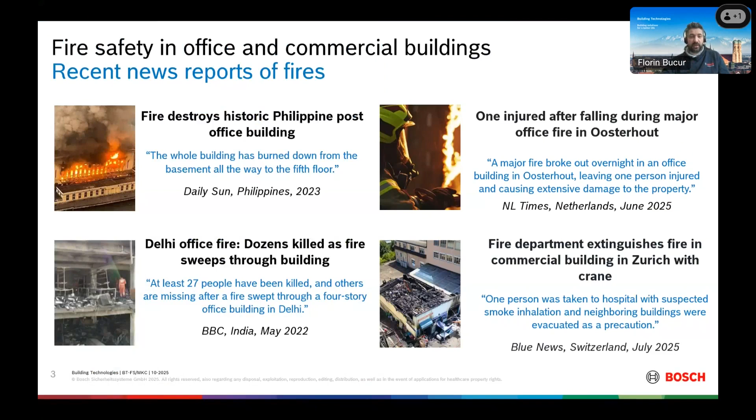As we know, offices and commercial buildings have incidents all around the year, all around the globe. So we see here a couple of examples from the last years where we had fire in different buildings around the world. We see from Asia, we see from Europe, Netherlands, Switzerland, and of course, these are events that we would like not to happen. We would like to mitigate these risks.

And therefore, we have to look into the specific challenges that this environment of office and commercial buildings sets up for our type of system. So let's start with these specific challenges. We have very high occupancies, so usually the commercial buildings are offices combined with restaurants, maybe hotels, maybe different other types of areas we're going to see in a second. So that means we have a very high rate of occupancy.

We have very complex layouts, usually high-rise buildings, a lot of floors, connected buildings, usually underground parkings that connect multiple overground buildings, so very complex layouts. We have valuable assets. We can have data centers inside.

We could have a lot of, let's say, different types of businesses running. And of course, it's very important to be compliant with the local and regional regulations for this type of building.

So what are the consequences when an event starts or even happens in these types of locations? Of course, this could lead to loss of life, which is the most grave one, and injuries. We could have property damage, business interruptions. I think that's also very important. Even if it's not a manufacturing site, there are still activities going on in these buildings, and this can also lead to loss of property, data losses, especially if we have data centers, for example, and finally to reputational damage.

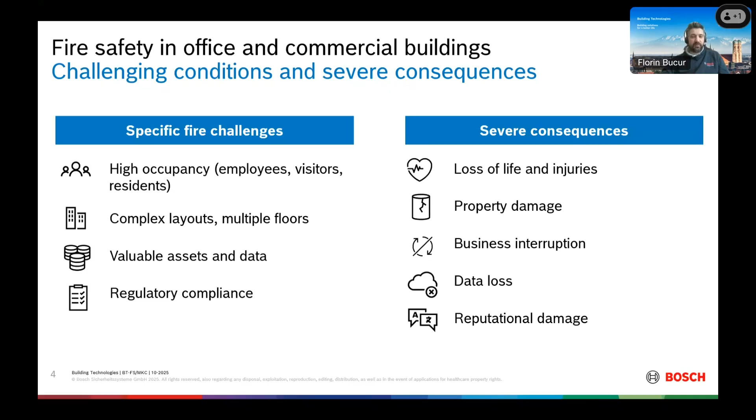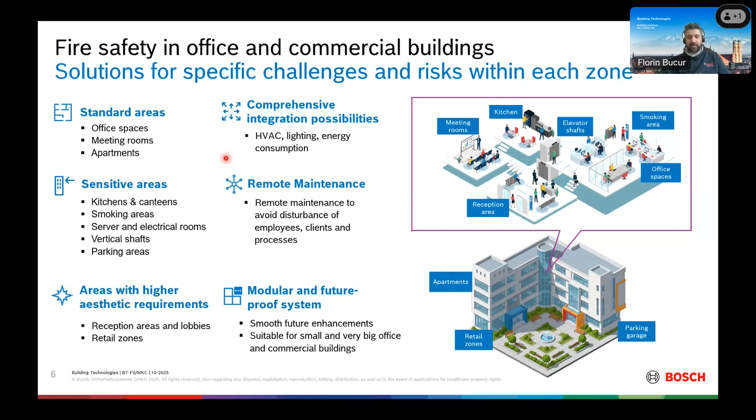And we are talking first about the standard spaces, office areas. These are normal meeting rooms. And pretty much everybody knows about this type of area. And you would think that this is a normal area with a low risk. But actually, there's quite a high risk, and it comes from two main factors that are combined here. One, it's a huge fire load because of the furniture, wood, paper, documents, decoration, whatever materials are in these areas, which are usually highly flammable, right? This, combined with a high density of electrical and electronic equipment that can be possible causes for a fire, basically increases the overall risk for such an area.

For that, of course, our solution is the Avenar fire detection system, with the Avenar panels and 4000 detectors constituting together a very, very reliable and early detection system. That's very important. Two aspects, the reliability and the speed of detection. Another aspect that comes to mind is the eSmog feature in our Avenar 4000 detectors, because this will allow us to basically avoid false alarms due to electromagnetic interference that could lead to interruption of business or activity in such places.

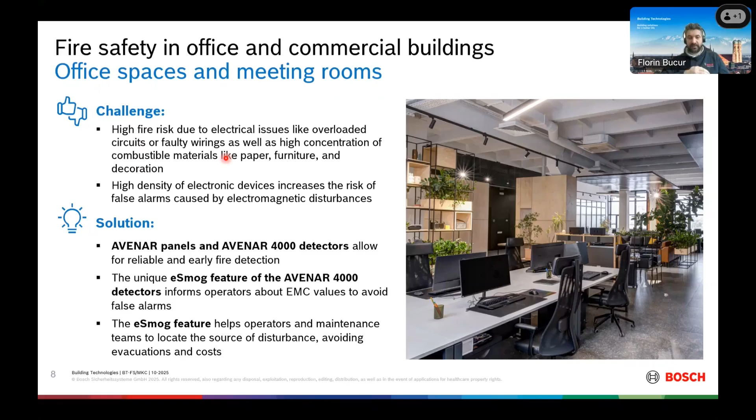Right, moving on. Let's talk a little bit about reception areas, lobbies, and these are usually areas with high aesthetic requirements like false ceilings, different architecture, and this is something that architects are usually very demanding about, the requirements of the equipment that's installed.

And our solution is the invisible fire detectors, as we call them, the detectors with virtual optical chambers that will allow the detection with no compromise in safety, but with, let's say, minimum unintrusive and minimum visible elements on the ceiling. So not only is it very discreet, it doesn't have a physical optical chamber, but it's also able to be personalized in different colors depending on the architecture.

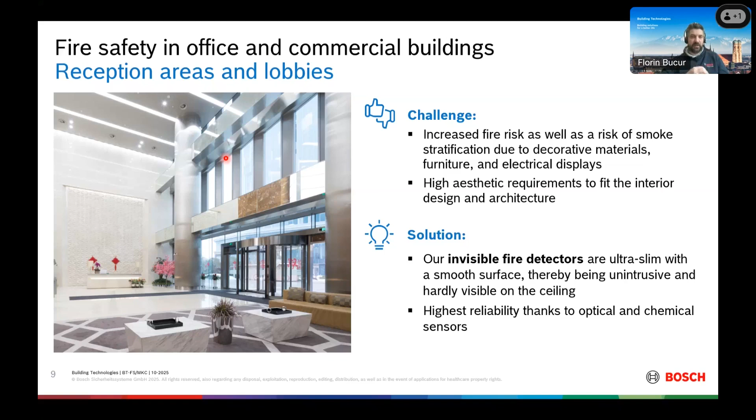Right, so kitchens and canteens, I think the high risk here is obvious for everybody. Still, maybe it's not very obvious when we're coming to the false alarms, possible sources like steam, for example, or fumes that are in the process of cooking. So we have on one side a very high risk due to the flammable materials and open flame in the processes, but we also have a very high risk of false alarms.

And for that, we answer with our Avenar 4000 multi-sensor detectors, which incorporate different types of sensors that together are working with an algorithm called ISP, or Intelligent Signal Processing, where all this data from these sensors is combined into patterns that very quickly decide if this is a real fire scenario or not. And this is very important.

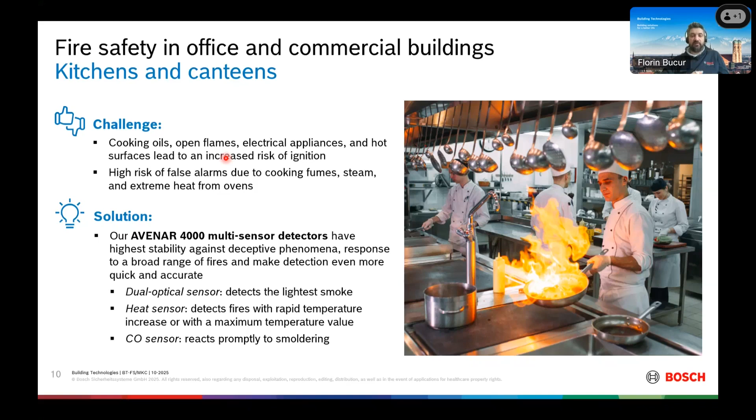On one side, not to evacuate the whole building every time somebody's cooking, of course. So we have to basically filter the false alarm scenarios, but also provide robust fire alarm. So when a fire scenario actually happens, to make sure that it is detected really fast and all the measures are in place.

Right. Smoking areas, I know it's dependent on the culture, background, territory, and so on, whether this happens or not. But where it happens, it's also a high risk, right? Because lit cigarettes are a fire source, of course, but also the smoke itself can be an alarm generation factor. For this, we use exactly the same detector we mentioned above, and due to these ISP algorithms, we can also filter cigarette smoke as a false alarm source. So this is important. If you have such areas in your buildings, know that there is a solution also for these areas.

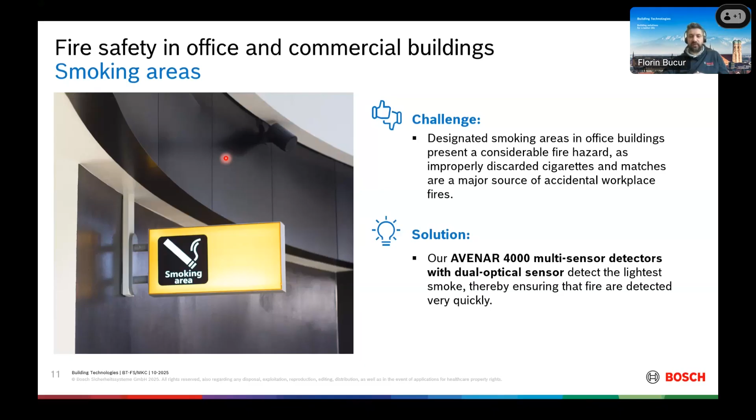Next on, if we talk about server, machine, and electrical rooms, data centers, or other similar types of rooms in the building, these are also high risk areas due to the density of the electrical equipment and fire sources. Think also about the batteries that accompany this equipment. These are also a huge risk that can lead to a thermal runaway and a catastrophic event, right? So there's a risk of rapid spread and an uncontrollable event if this is happening.

So our solution here is a very, very fast detection method, the aspiration smoke detectors that can sample the air in the room, but also from within the equipment racks, and analyze it for the presence of very thin smoke particles in the sample. And it also comes with the possibility of ISP, the intelligent signal processing we discussed earlier for the point detector. It applies also to the aspiration smoke detectors. So a really fast, very accurate method here to detect even earlier by sampling the air inside the equipment racks.

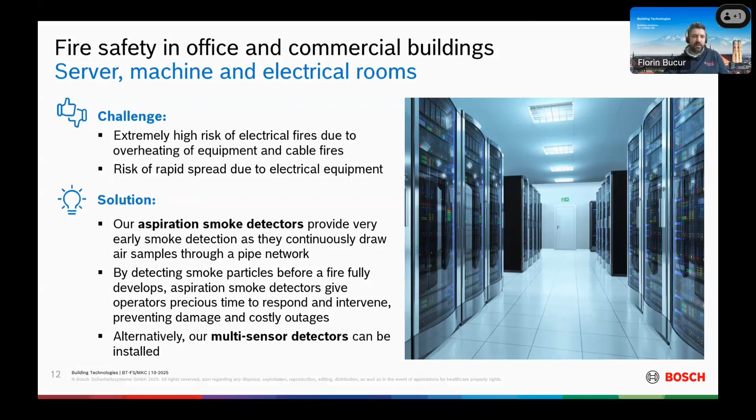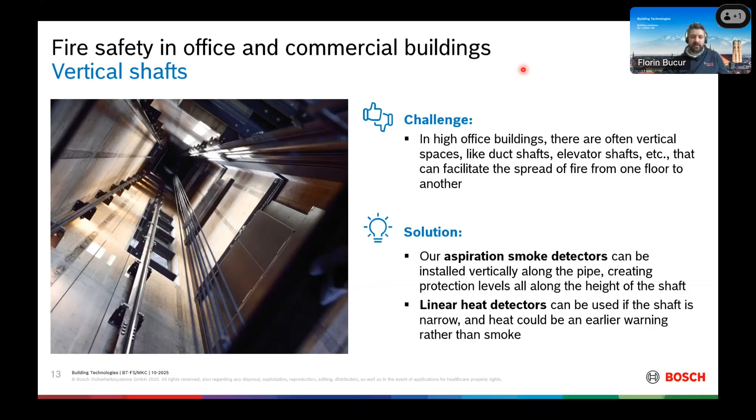And this is, of course, a solution that can apply not only to vertical shafts, but also to other tight spaces, like, for example, false floors or even false ceilings sometimes. Although in false ceilings it's more common to use point type detectors.

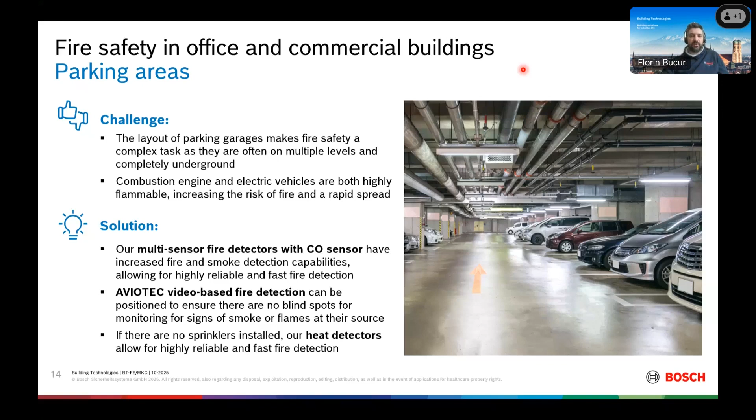There's also the option to use AVIOTEC, our video-based fire detection camera, that will allow flame and smoke detection at the source. We don't need the smoke, for example, to rise to reach a certain detector; we just have the image analyzed and decide really, really fast if this is a fire scenario or not. So different solutions for a very, very challenging part of commercial buildings.

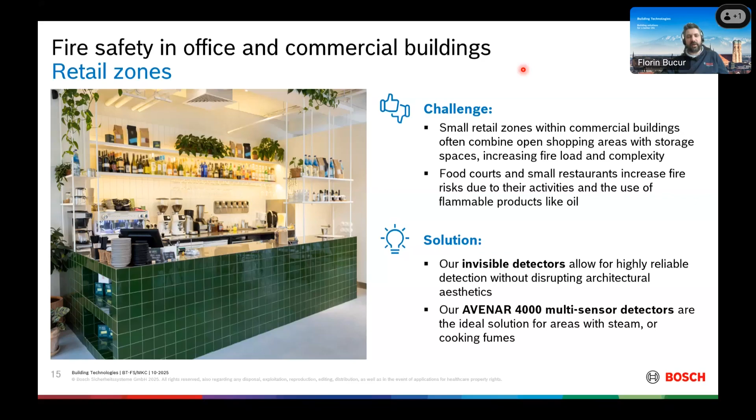So basically, we have a combination of factors, and our solution, of course, is the same invisible detectors that can address the aesthetic requirements and also the ease of maintenance, but also the multi-sensor detectors, if this is an area that is prone to false alarms due to the different factors we mentioned earlier.

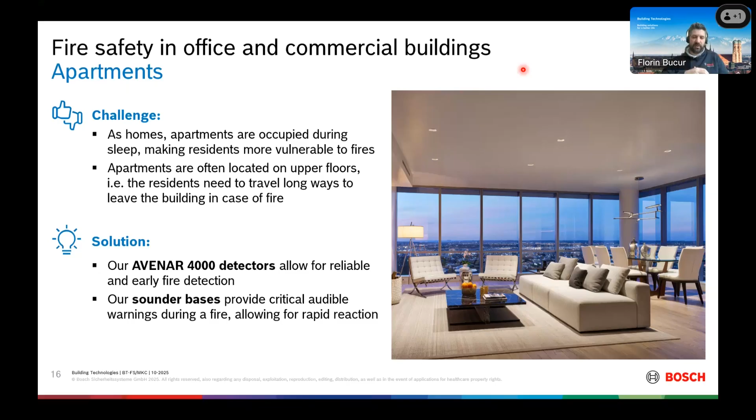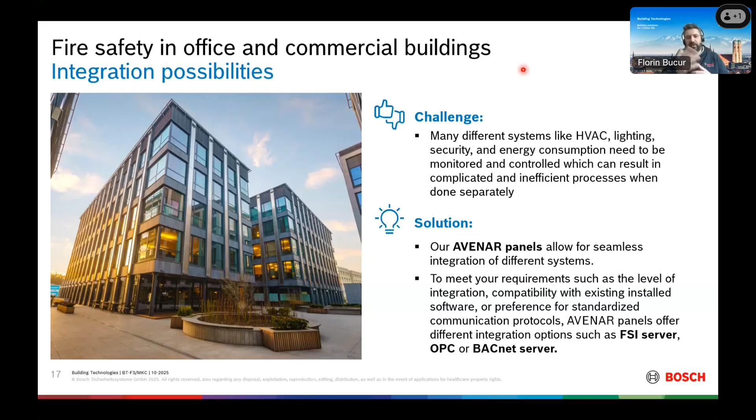More than that, we have the option to integrate on the hardware level with different types of interfaces, depending on the system we need to integrate. For example, we want to send the elevator to the ground floor, cut the electricity in some parts of the building or in a specific room, or shut down a gas valve to prevent a catastrophic event, and so on. All these are possible via different types of hardware interfaces, but also on the data level via the protocols I mentioned.

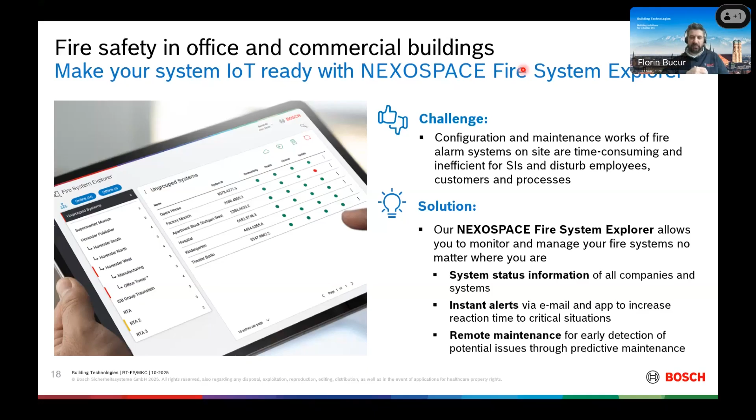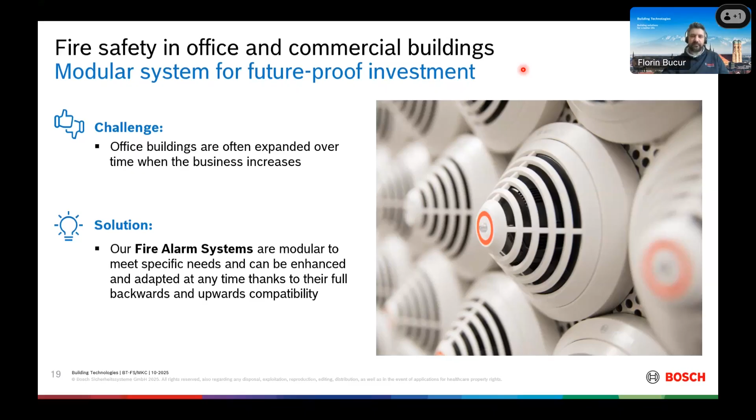So if we have to make a conclusion about what we discussed so far, we looked into these challenges. We came up with solutions for each of the challenges. We looked at the key factors why Bosch fits this vertical. So we have extracted here 4 points. First one, reliability. Very fast and accurate fire detection is crucial in this type of building, with minimal false alarms. We don't want to disturb the occupants. We want to have a smooth operation inside the buildings.

Durability. Our products are made to last. We think these products usually outlast the requirements, normally the local requirements about the lifetime permitted for operation. So usually the lifetime of the product, or the cost of ownership, is also extended through this durability of the products that we offer.

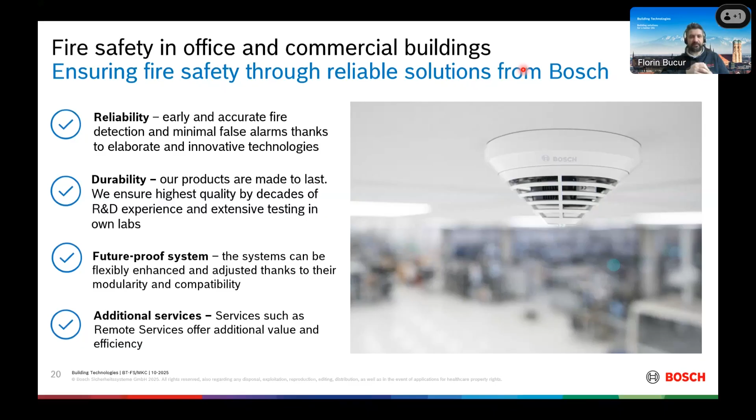A future-proof system allows the system to be enhanced and adjusted, and this is because of the modularity and compatibility features of the system. And finally, additional services that are very important, like, for example, the remote services that we offer, adding additional value to our system. So we have this as a conclusion, and then I will move to the next part, which is to talk a little bit about the components of our system.

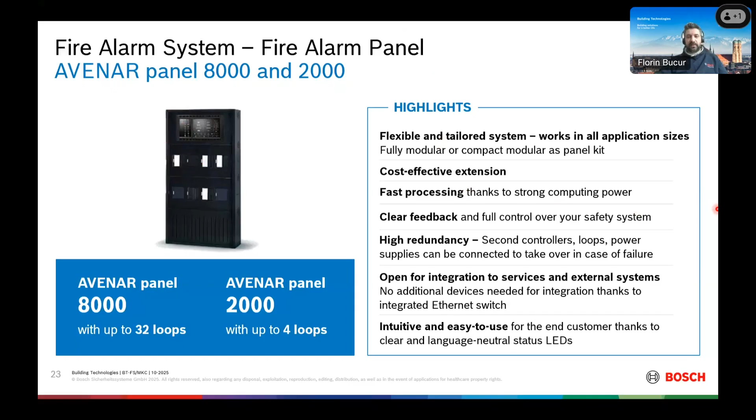Next, let's look at the peripherals a little bit, and we start with the Avenar 4000 detectors. As I said earlier, it's a family of detectors that can come in different flavors with one, two, or multi-sensors inside. That can be optical smoke, dual optical smoke, heat, temperature, or even carbon monoxide. So there is a combination of those that can be used for optimal detection.

It's a very fast and very accurate detector, thanks to this dual ray technology. Basically, the DO detectors, double optical detectors, have two LEDs inside the optical chamber, ensuring detection calibrated on the specific particle we are looking for, not generating false alarms from other particles like steam, cigarette smoke, and so on.

Also, this intelligent signal processing feature that creates patterns of the values from the sensors helps decide very, very fast if this is a real alarm scenario or a false alarm scenario. It contributes to the speed of detection, but also to the robustness.

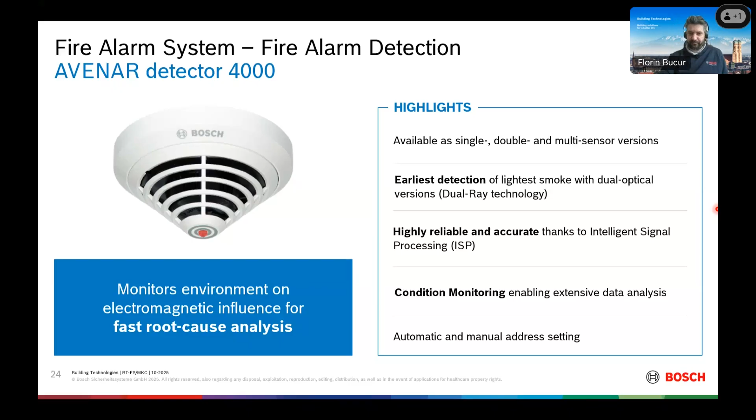Right. The second series of detectors, because this was Avenar 4000, is the 520 series, the invisible detector, as we call it. It has a virtual optical chamber. You see on the detector the LEDs that are contributing to the detection, but the detection itself is happening somewhere 5 centimeters below the detector.

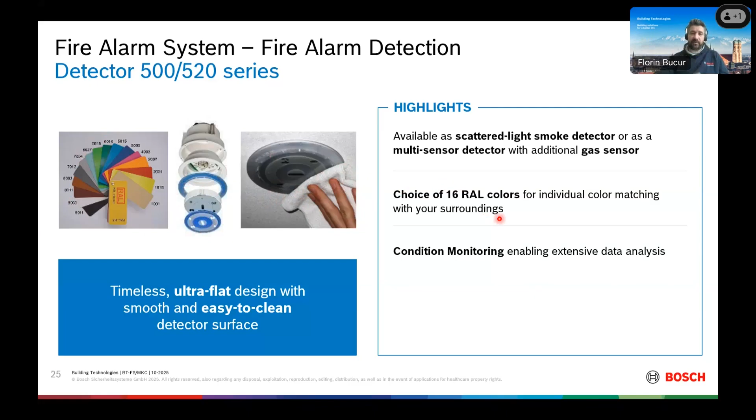And this gives a few advantages. One, it's non-intrusive aesthetically speaking. It can be personalized with a lot of colors, as you can see here with these color drawings, so it blends easier into the design, but it's also very easily maintained. You just need to wipe the surface clean, and that's it.

Talking about detection, we also have to mention the AVIOTEC, which is our AI-powered video-based fire detection. So it basically uses neural networks to analyze the images and decide if this is a fire scenario or not. It can detect really fast smoke and flame at the source. So we don't need, for example, the smoke to reach the ceiling. So especially important, for example, for high ceiling areas.

And the detection is also very fast. It's within seconds, including the confirmation, not only the detection, but also the validation process. It's very suitable where we have higher fire loads, or different other particles that can make traditional methods of detection not suitable. And very important, it can also work in outdoor environments where we don't have too many options to detect fire. This is also a solution for such areas.

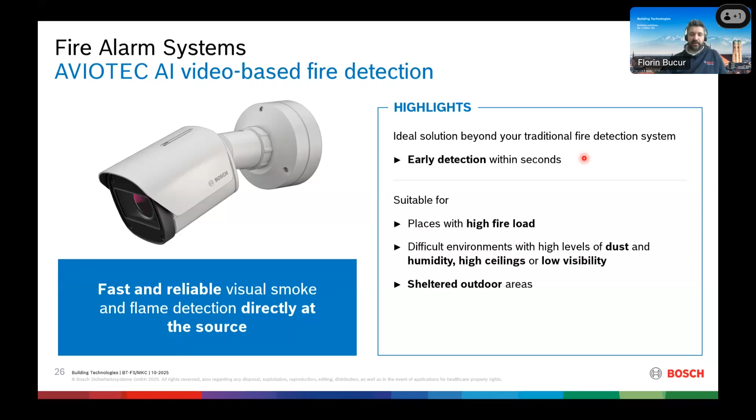Right. And concluding the detection part, we have to also discuss a little bit about our aspiration smoke detectors. We have quite a range of units with one or two detectors inside that can be connected straight to our LSN loop. It's a very powerful unit that makes use of the same ISP like the point detectors, basically constructing patterns of signals and deciding very fast if this is an alarm scenario or a false alarm. It's very robust regarding the airflow monitoring and handling of the variation in the airflow.

For example, the thresholds can be moved with the pollution, or we can have a drift compensation for that. And finally, there is a range of products in this family that can also identify the sampling point that generated the alarm. So imagine you have a room with 5 rack cabinets, and you have a pipe that runs through all these 5 cabinets with 5 sampling points, and you can basically find out very early which of these 5 generated the alarm. I think this is very important in such a use case.

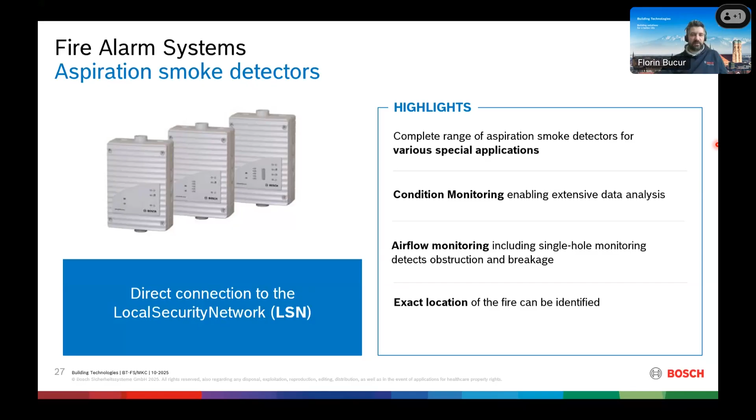Right. So since we passed the detection part, let's also discuss a little bit about the signaling devices. And here we have to mention the uninterruptible sounders. So sounders that come with a battery inside, ensuring that if the LSN line is destroyed, the communication is out, the power supply is out, still the sounders will continue running for up to 30 minutes if separated from the loop.

I think this is very important, especially keeping in mind the high occupancy rate for this type of buildings. It's important that we keep the signal devices running, even if there is a catastrophic event affecting the fire alarm system itself, and it is taken out of commission.

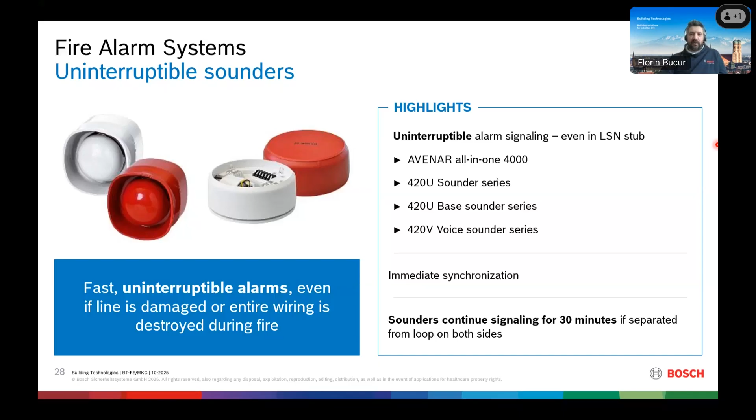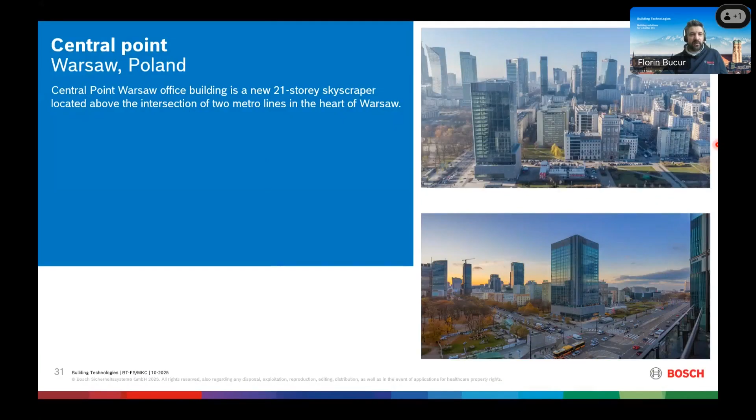The second one, in Warsaw, in Poland, Central Point, a 21-story skyscraper located centrally. Also very important here was the connection to the public address system via Smart Safety Link, and also minimizing false alarms was key. It was not a problem to address because it's a new building, but it was a key point in selecting the right supplier for the fire alarm system.

Also very important was the modularity and flexibility in designing the office layouts and the scalability to extend it even after the building started operating. So, just as a reference of what it's possible to do. There are of course many other references, but we just picked these two to pique your interest.

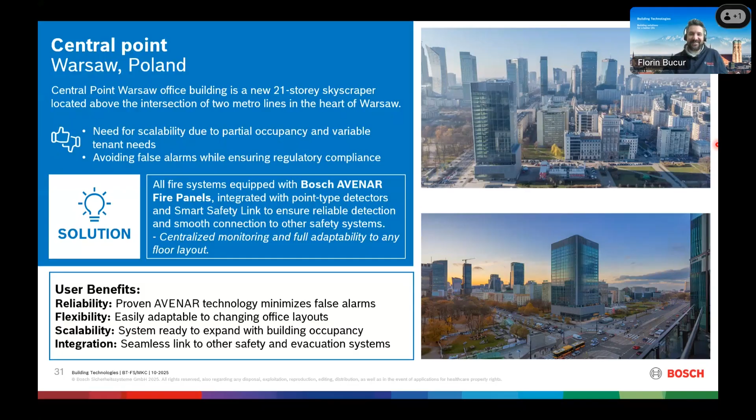And I think I took a little bit more than I should, Valeria. It was okay. It was not boring. Interesting presentation. So yeah, thank you for that, Florin. My pleasure.